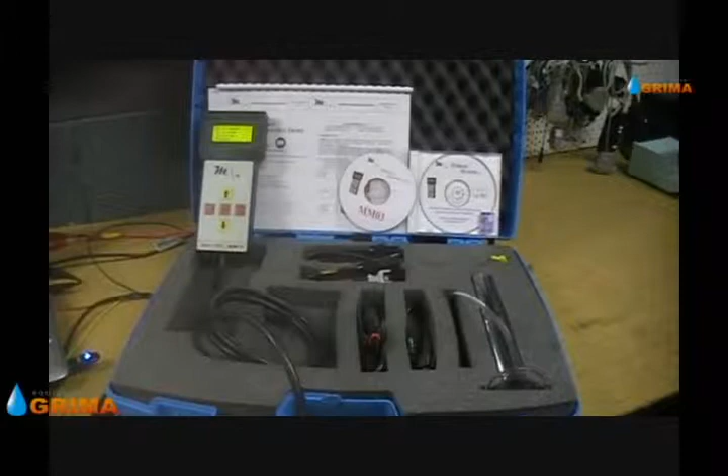Hi, today we are showing a new product to our range, the MM03 common rail tester. As it is not possible to show all its functions in one video, this will be part one of many other videos. And this first video is a general overview, and later on each function will be described in more detail.

This product allows garages to make correct diagnosis of faults in the common rail system on the vehicle, so ensuring that only the faulty component is removed for repair or replacement. The MM03 works on the following systems: Bosch, Delphi, Denso and Siemens common rail systems.

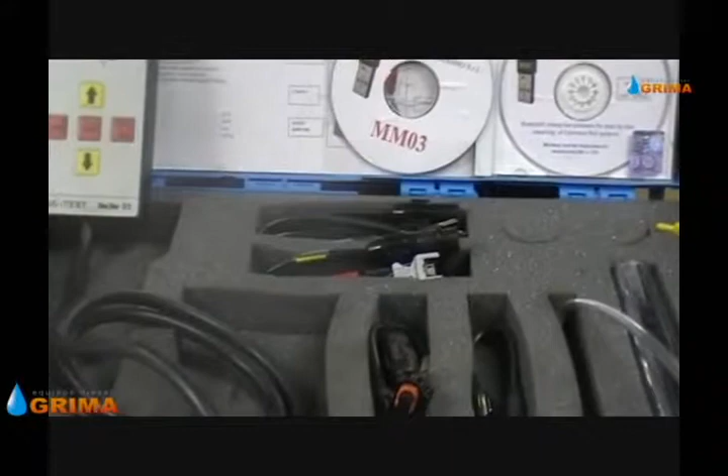On the car, the MM03, in complete independence of the ECU, can perform these functions: test common rail pressure in any working condition, also has automatic recognition of pressure sensor brand as well as testing its efficiency. Can also manage and control testing of the high pressure efficiency by allowing the operator to regulate the pressure from 0 to 1500 bar depending upon the common rail system.

Management and control testing of the pressure regulating valve or inlet metering valves efficiency by driving them with the MM03 independently of the ECU. And it also allows the operator to vary the common rail pressure when doing back leakage tests.

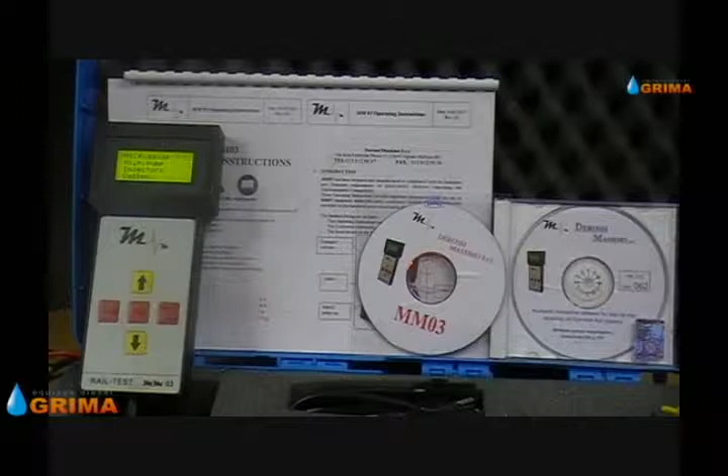Also, when used in conjunction with a hand pump on the bench, you can drive the injectors, both coil and piezo, allowing you to test the minimum injector release pressure and view the quality and uniformity of the spray pattern. Also checking the back leakage on the bench. And while driving the injector, you can vary the injector opening frequency and drive the injector in either pilot, pre or main injection.

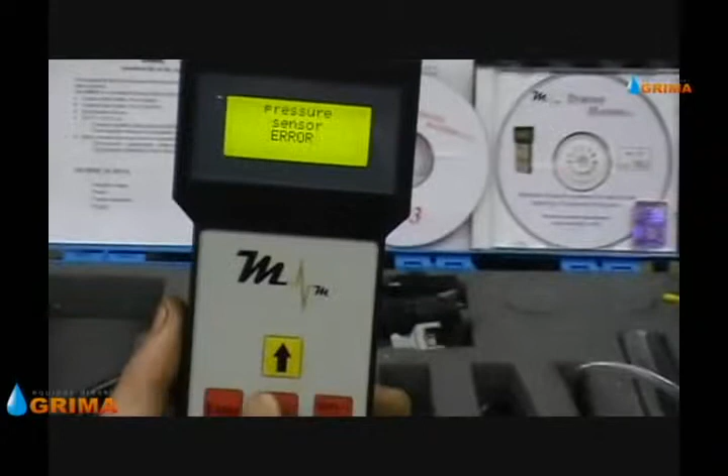Now we're just going to show the hand unit itself with the displays on the screen. First of all, when powered up, this is what comes up on the screen. So you have high pressure gauge, press enter. It's coming up pressure sensor error because we're not connected to a sensor at the minute, so it's automatically detecting we're not connected. Or if the sensor is faulty or a wiring problem, it will also come up with the pressure sensor error. If we were connected to a pressure sensor, it will display the reading in bar.

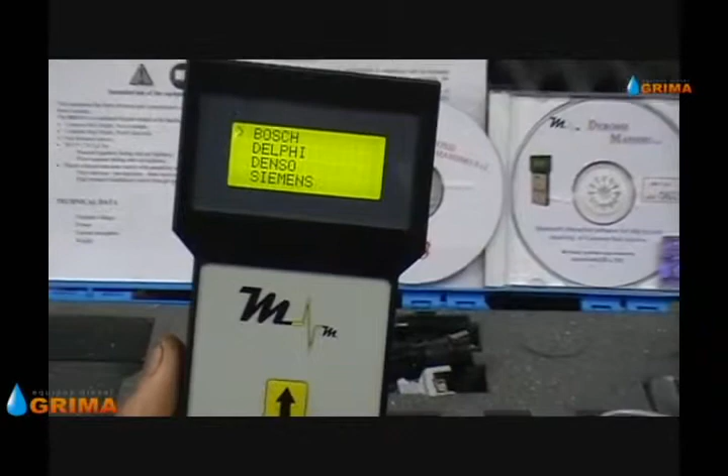Escape out of that. Then next we have high pressure pump. So you press enter. You have Bosch, Delphi, Denso and Siemens. Just went to Bosch. Then you have the different types of Bosch pump: CP1, CP3, CP1H normally open, CP1H normally closed. So we'll go CP3. Then you have different options: startup, force startup and tightness test.

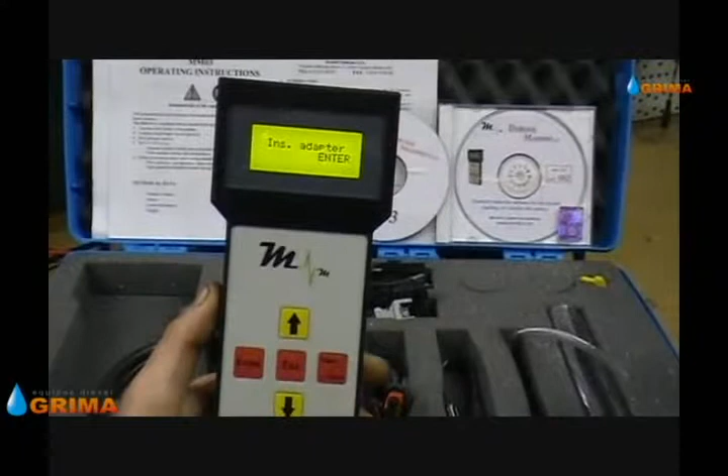Go enter startup. It's telling us here to insert a dummy adapter, because when you disconnect the connection from the pressure regulating valve and connect the MM03 to the regulating valve, now the connection from the ECU side is left open and the ECU may log a fault, so you have to insert a dummy adapter. So we'll just say that we have. So you press start and startup, enter.

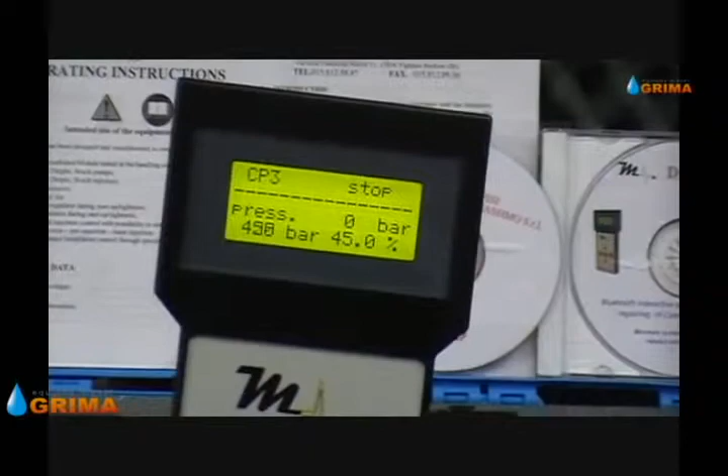Now if we were connected to the vehicle, we'd be reading the pressure off the rail sensor, and we're controlling this pressure through the regulating valve or the volume control valve. And then you can adjust the pressure here with the up and down arrows. And to start, then you just go start or stop.

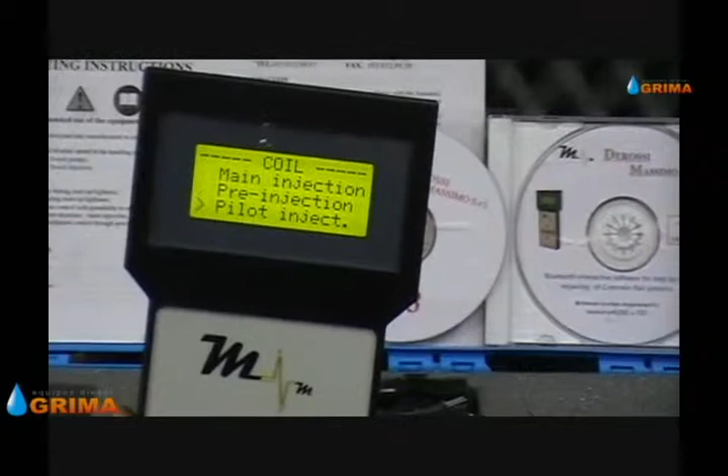The next thing you have is injectors. When you go in here, you have to choose either coil or piezo. Select coil. And the options in here, then you have to operate it in main injection, pre-injection, pilot injection. Main injection. This is telling you to use this pressure sensor part number in conjunction with the hand pump on the bench, so that you can read the pressure directly from the rail pressure sensor instead of depending upon your hand pump gauge being accurate.

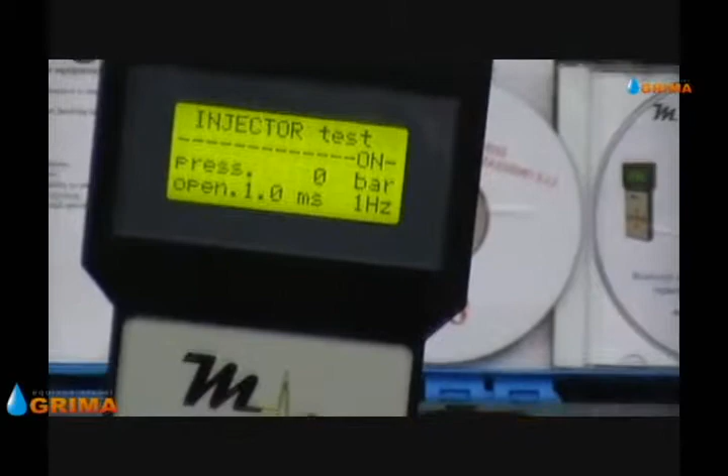Press enter, and now if you press enter again, and press start, it will now be activating the injector, and you'll also be reading the pressure from a rail sensor connected to the hand pump. And you can vary the frequency of the injector here by the up and down arrows. So again, like I said, you have main injection, pre-injection and pilot injection. And then also you have piezo.

Now in the standard kit you get the hand unit, the cable, instruction manual, the dummy simulators required for when you disconnect the pressure regulating valve and connect the MM03 to it. You need to connect this to the ECU side or the wiring loom side to prevent the ECU from going into default. And then you have a universal probe for connecting to the rail pressure sensor signal wire, so you can read the fuel pressure.

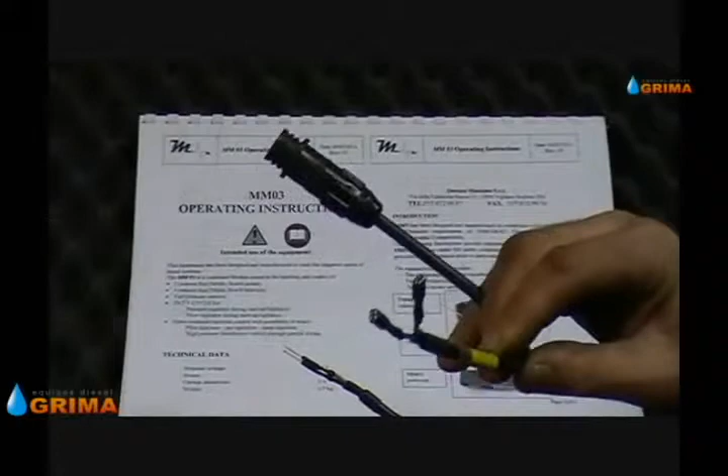You have a universal connection for connecting to various injectors and volume control valves and pressure regulating valves. Then you have the Bosch injector connection, Delphi injector connection, and then you have various pressure regulating valve or volume control valve connections. Also you have a graduated burette and injector leak back connection.

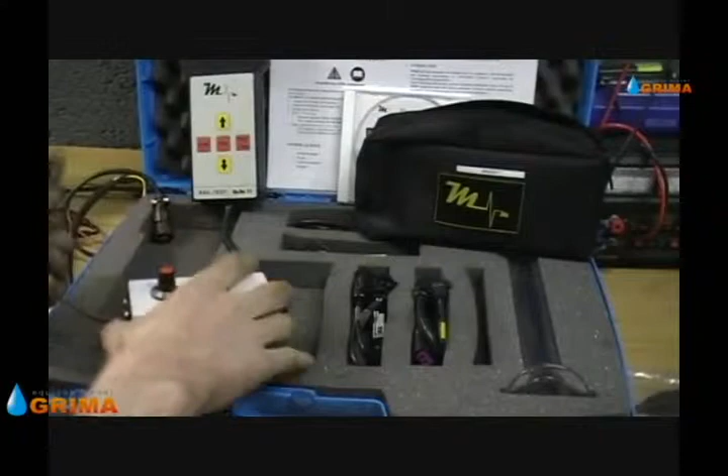Now we're going to show you some of the most important optional extras for this kit. Firstly, you have a connection cable for Siemens common rail system for connecting to the volume control valve and the pressure regulating valve. Then we have the optional piezo injector driver kit, used in conjunction with the MM03, which will allow you to drive both Bosch and Siemens piezo injectors on the bench.

The next optional extra then is the software Bluetooth. This software allows the user to graphically display the tests on the PC and to save and to print the results. So in other words, anything you're doing on the hand unit will be displayed on the PC via Bluetooth and is updated in real time. So anything you're reading here instantly will read the same on the PC. So you can see pressures, actual pressures, target pressures, minimum max pressure, all this on the PC.

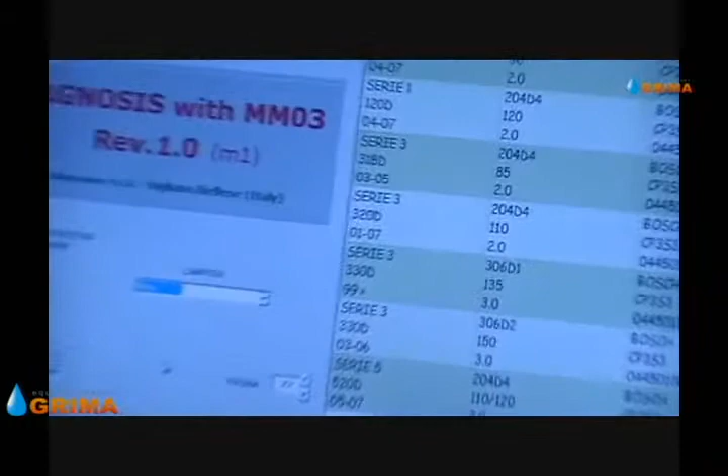And then you have some information also in a database, a branded database. For example, you'll have the type of system, part number, etc. And also you have kind of a guided tutorial then on the tests. So say for example we go into high pressure gauge, press enter. Now you can view on the PC, it shows you the various locations of the pressure sensor, and then it will show us in a graph form the pressure when we are reading it. This can be printed and saved.

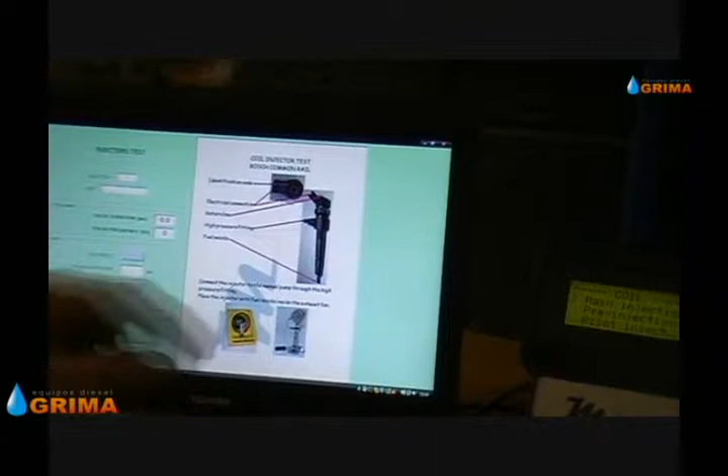Also then we go to injectors, coil, piezo. It gives you instructions then on how to perform this. You can put in the injector number, the code, then you can view the pulse duration in milliseconds, the frequency, the pressure you're reading, and it gives you a brief description then on the common rail injector and how to connect it.

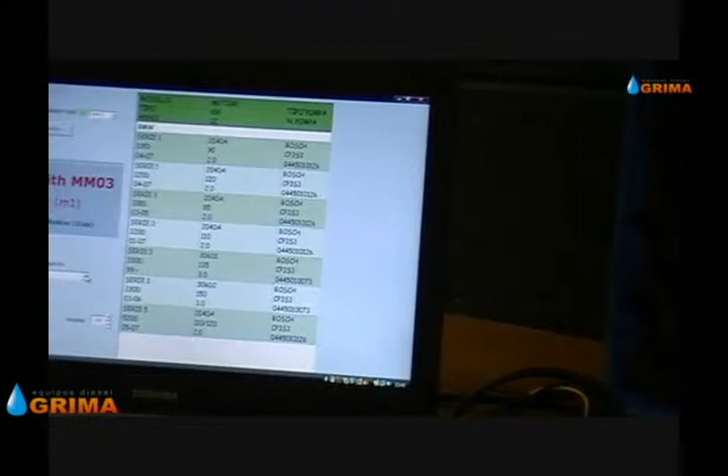So it's a useful software and kind of guides you through all the various tests you can perform with this. And as we said, it's displayed in real time, so you can save, view later, print to show to the customer, various other things.

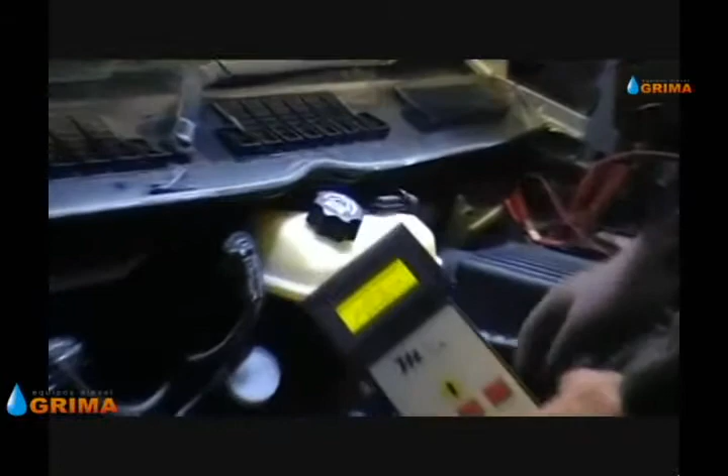Hi, today we are showing part 2 of the MM03 and we'll be using it on this 2005 Fiat Scudo 2 litre JTD with Bosch common rail fuel system. So you just connect up the tool onto the battery, positive and negative. Tee in on the rail pressure signal wire; we already have this connected.

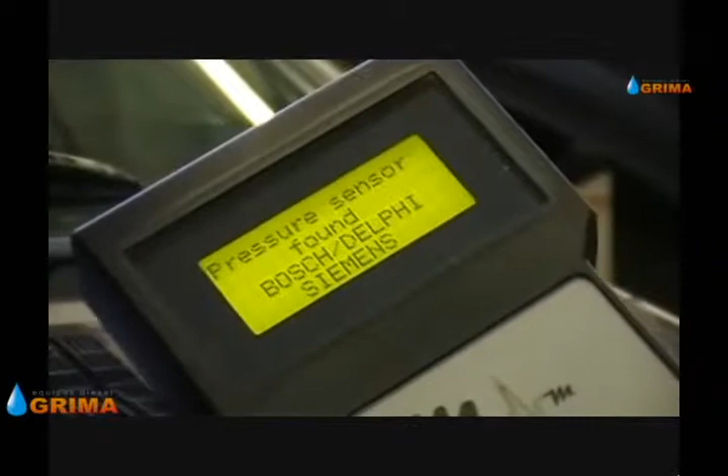Then you just go into high pressure gauge, enter, and the tool then will automatically recognise the sensor. So it's found Bosch, Delphi, Siemens sensor, which are similar in the way they operate. For example, if we were working on a Denso system, it'll pick up it's a Denso. If there was an error with the sensor or a problem with wiring on the vehicle, when we go to this stage, it will come up no sensor found. So you'll know straight away if there's a fault with the sensor or the wiring.

So it's found the sensor. Press enter, and it's doing the 0 calibration. Now already it's reading close enough to 0, so we know straight away our 0 point for the sensor is good. So press enter. Now we can start the vehicle and monitor the pressure.

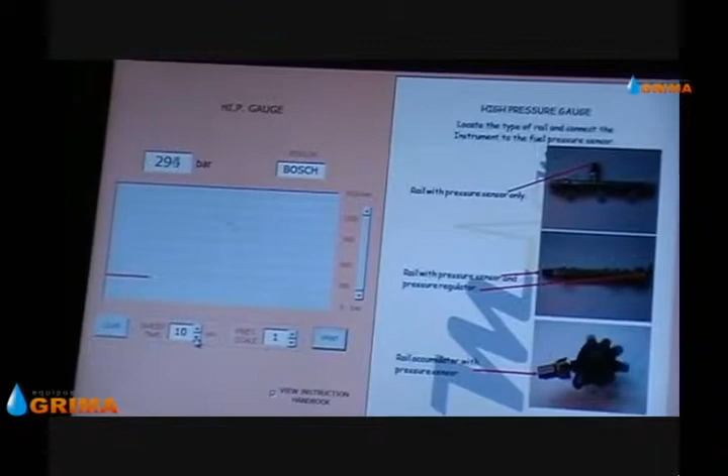Also, if you're using the Bluetooth function, you can view it on your PC in a graph format. You can adjust the pressure scale, lower or higher, the sweep time on the screen. Watch me accelerate.

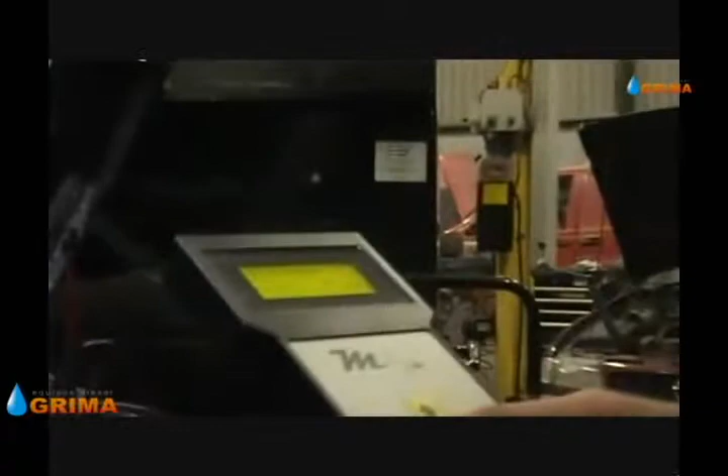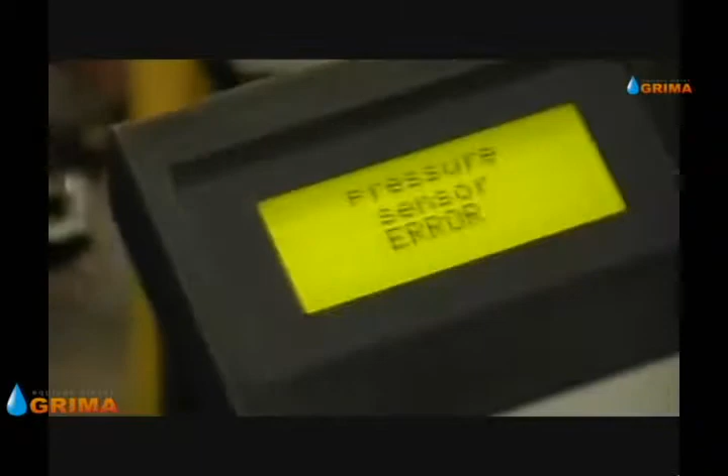So that's it. So it's one of the first things where you can read the pressure directly off the rail pressure sensor. And as we said, it auto detects the type of sensor and does a test on the sensor when you go in first. For example, if we try to connect now with the ignition switched off, it comes up pressure sensor error because the ignition is turned off in the van and it's not registering it.

This part of the tool is very useful, for example, if you have a non-runner and you want to check the common rail pressure. For example, if your diagnostic tool doesn't have this function for reading the common rail pressure, or a lot of diagnostic tools tend to lose communication when you're cranking, so that you cannot view the pressure live, so you can view it with this.

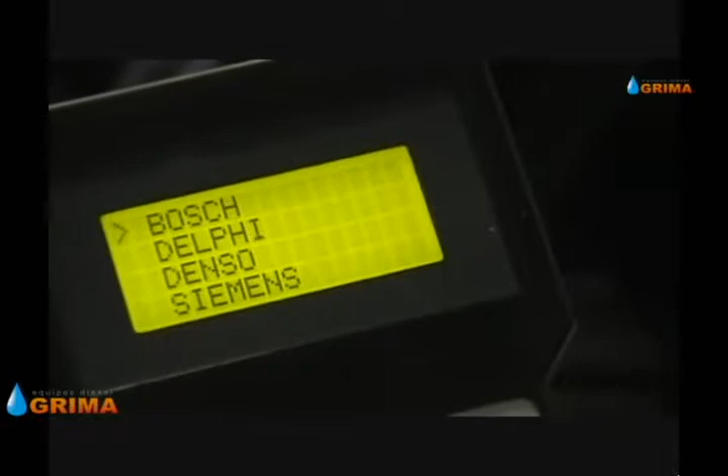Now the next part where we can go into a high pressure pump. Go here, and then you have Bosch, Delphi, Denso, Siemens. And just remember, everything we're doing here is displayed on the PC as well, via the Bluetooth, which is kind of a tutorial about how to connect to the common rail system. So we're going to Bosch, and CP1 is the type of system.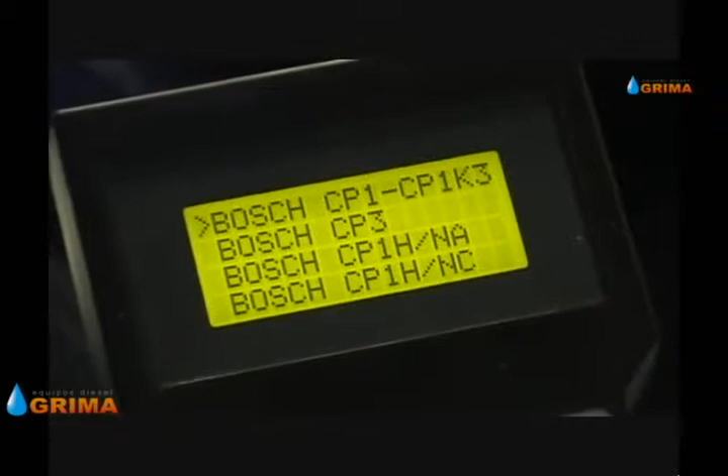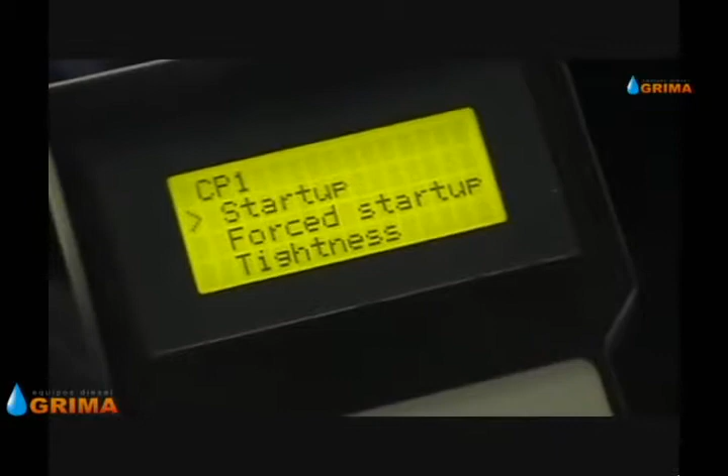And sorry, I forgot to mention, we're now connected to the rail pressure sensor signal wire, and we're connected to the pressure regulating valve with the MM03, and we have the dummy blank in the ECU side to stop the ECU from going into default. So I press enter, and so now we have startup, forced startup and tightness. So we're going to start up, enter.

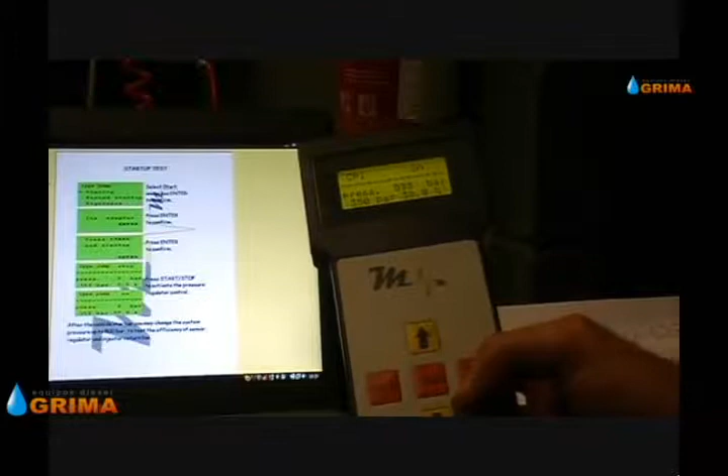Now it's telling us to insert the adapter. This is the dummy adapter into the wiring loom or the ECU side. Insert adapter, press enter, enter. So now when we switch this on, the MM03 is going to be driving the regulator to give us 350 bar of pressure. So if I press start, start up the engine, it will take a few seconds to stabilise.

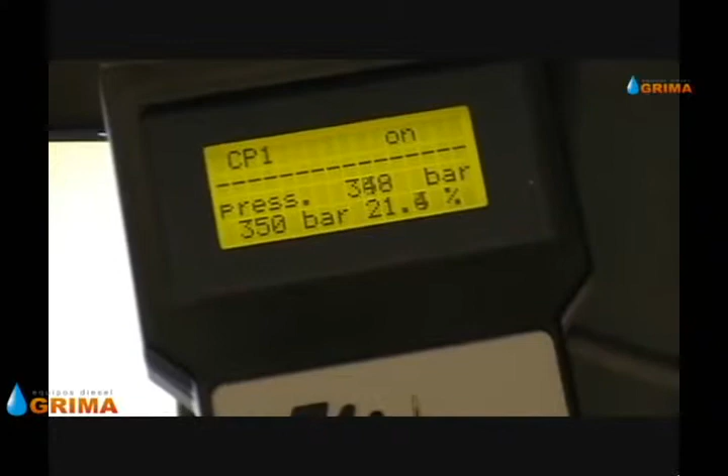You can see that the actual pressure, 350 bar, is matching the set pressure that we're driving the regulator to. So this is a good indication that the system is operating correctly, because the target pressure is matching the actual pressure.

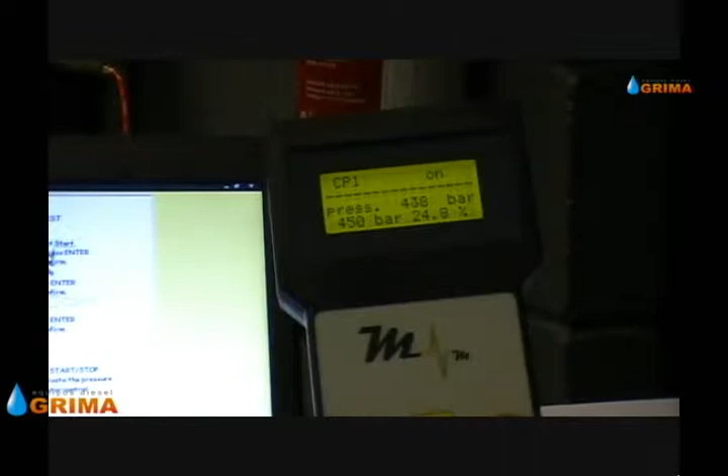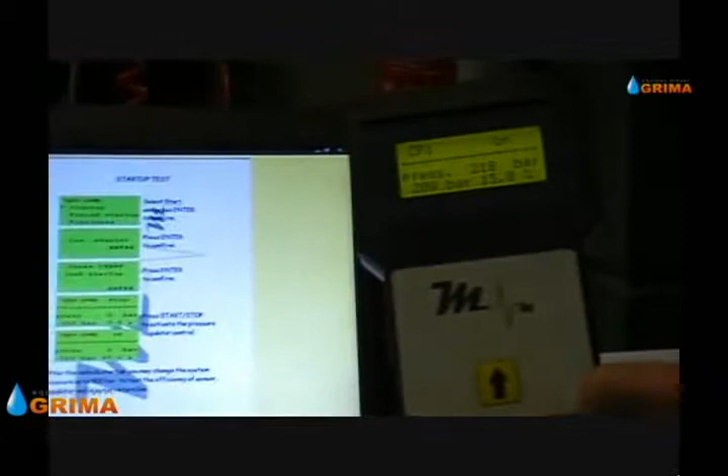Now we can also adjust the pressure here and see does it respond to the actual pressure. For example, if we go up 400 bar, it's coming up to 400 bar. So we go 450, very close to 450, so the system is fine. We can adjust it the whole way up to 500 bar, and then back down to 200. Now we can press stop and it will switch off the regulator completely.

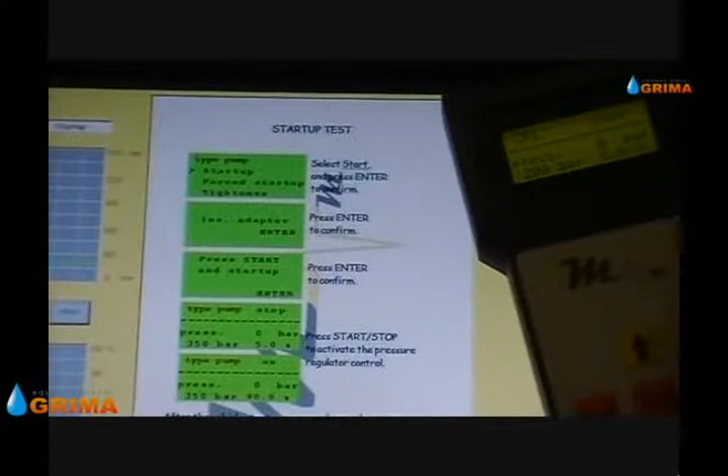In that test we were driving the pressure regulating valve independently of the ECU. This is a very useful test to check the efficiency of the system by comparing the target pressure with the actual pressure, and it proves that the regulating valve is working okay as it responded to our adjustments.

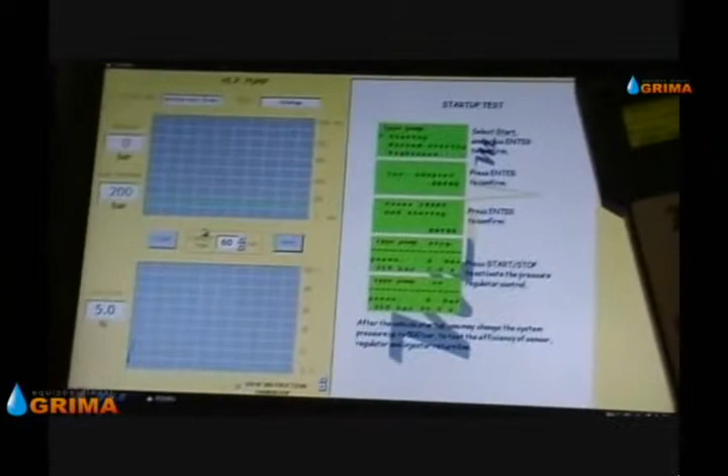And also, if you had a non-start case where the pressure was not building up, and if you drive the regulator with the MM03 and the pressure then builds up, it proves that you have a fault with the wiring to the pressure regulating valve, or a fault with the ECU where it is not signalling the pressure regulating valve.

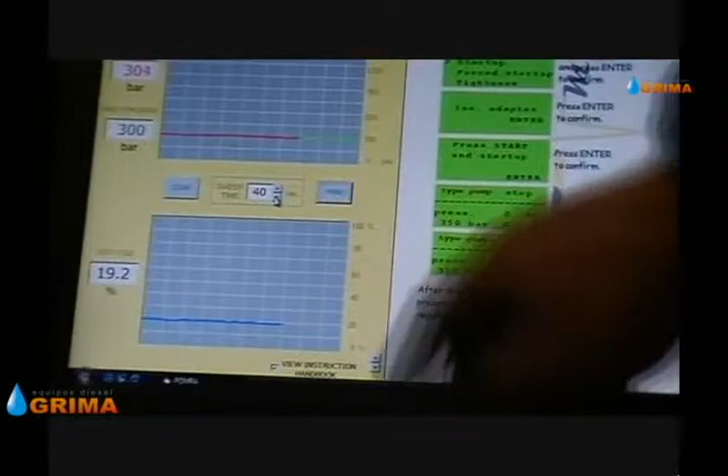When using it in conjunction with the software via Bluetooth, you can view the pressure, the actual pressure in red and the target pressure in green. So as you can see, the red line is right on the green one, so this is a good system as the target pressure is matching the actual pressure.

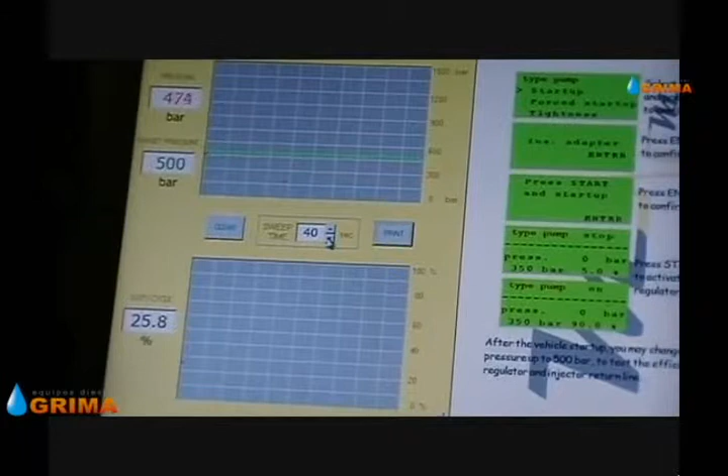You can also see the duty cycle; this is the percentage that we are driving the valve on. If we adjust the pressure, you watch the duty cycle increasing, the pressure here increasing. As we said earlier, you can adjust this up to 500 bar.

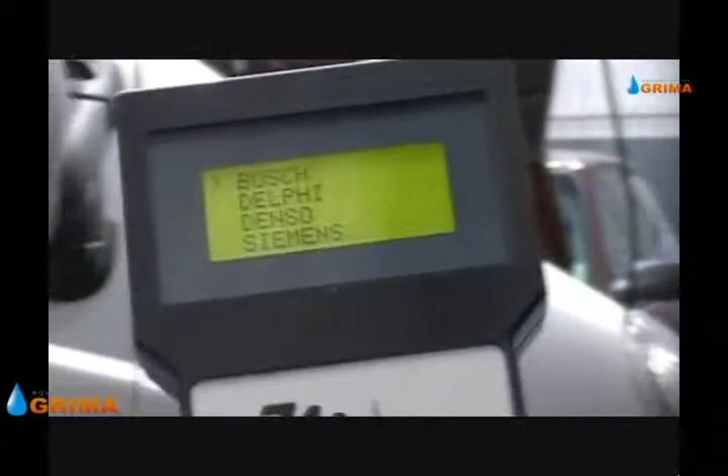Now the next test we're going to do is a tightness test. This checks for tightness or efficiency when cranking. It's an ideal test for a non-runner. When we're doing this test we don't want the engine to start, so we disconnected the cam sensor, or alternatively you can disconnect the injectors.

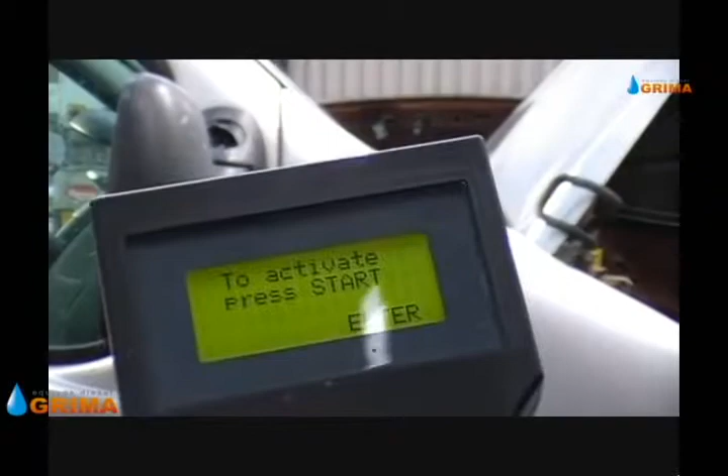So next then we go into Bosch, CP1, tightness. So it says do not start motor, so we have the cam sensor disconnected. And now we'll just get ready to crank this while we're doing it. When I tell you there. Okay, crank.

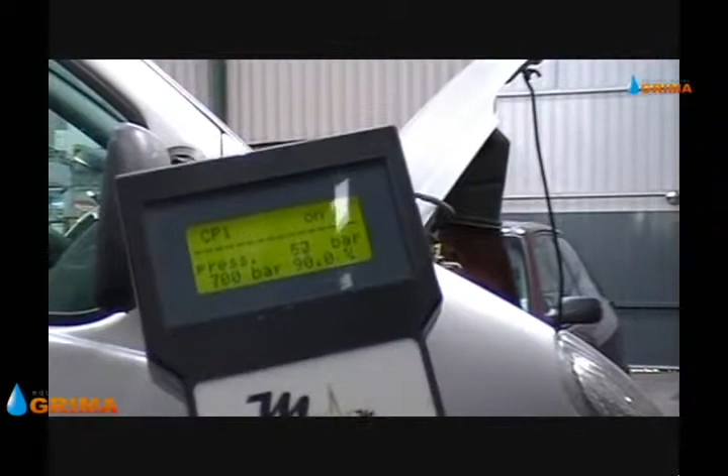Okay. So when we're doing this test, as you heard, the battery started to go down, but the pressure still rose to just under 700 bar. So this is a good indication of the efficiency of the system, proving that we haven't got too much leak back from injectors, proving the efficiency of the pump, proving that the regulating valve is working, and various other things.

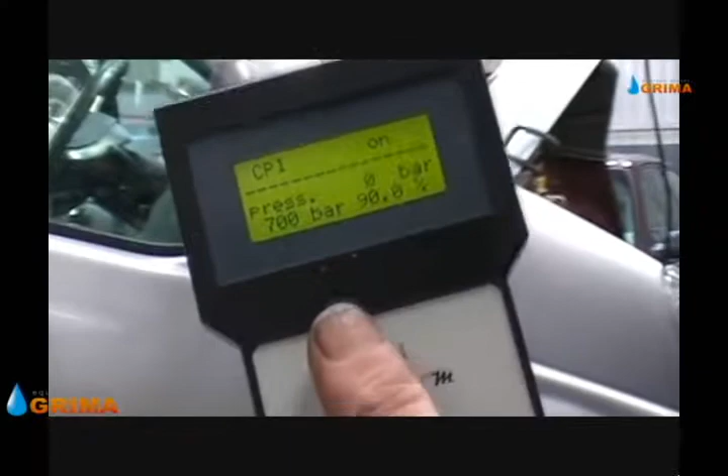The next thing we could do then, if this pressure didn't rise when we were cranking, say for example only went to 300 bar, is maybe check the injector leak back when cranking. If you had too much leak back from an injector, you could remove the pipes and fit blanks to the fuel rail, so you're taking injectors out of the equation, and then do the test again. Now if the pressure did increase to 600-700 bar, we know the injectors are the problem.

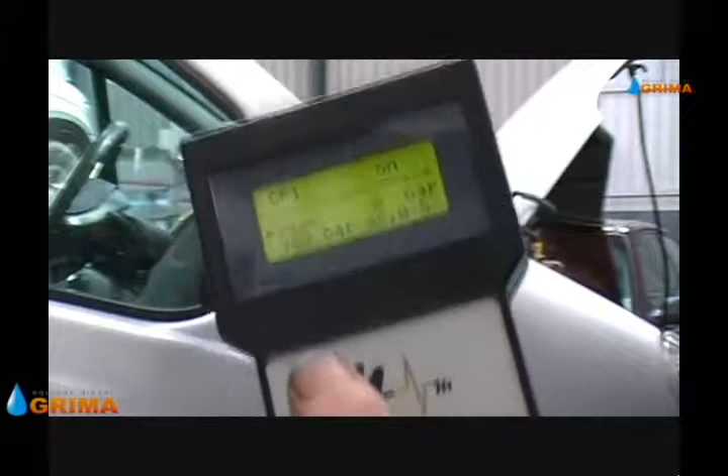If the pressure still didn't increase, the next thing we could do then is remove the pressure regulating valve and fit a dummy regulator into the back of the pump. So then if the pressure did increase, we know it's a regulating valve fault, or if it didn't increase, then we know it has to be the pump.

And in that last test, sorry, I forgot to mention, the tightness test, the MM03 was driving the pressure regulating valve to give us a commanded pressure of 700 bar, and we achieved just under 700, so this is okay.

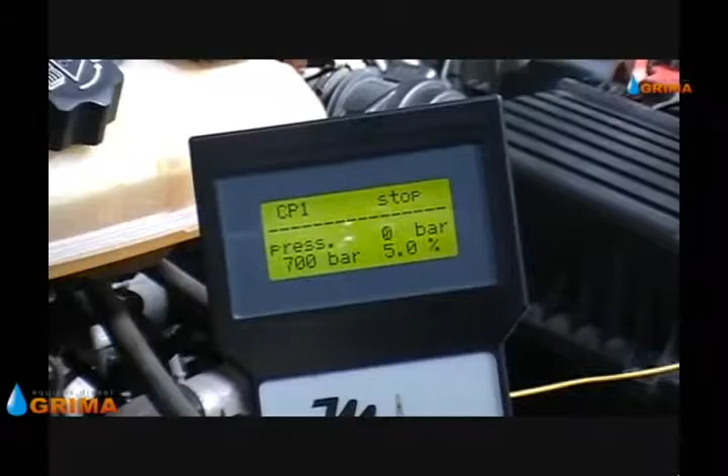Another test we can do then on the pressure regulating valve is to check its mechanical efficiency. We'll disconnect the MM03 from the regulator and also leave it disconnected from the vehicle's ECU. So when there is no supply to the regulator, with the predetermined spring pressure, we should have a cranking pressure of 60 to 70 bar, and if we have this, we know that the mechanical integrity of the valve is okay.

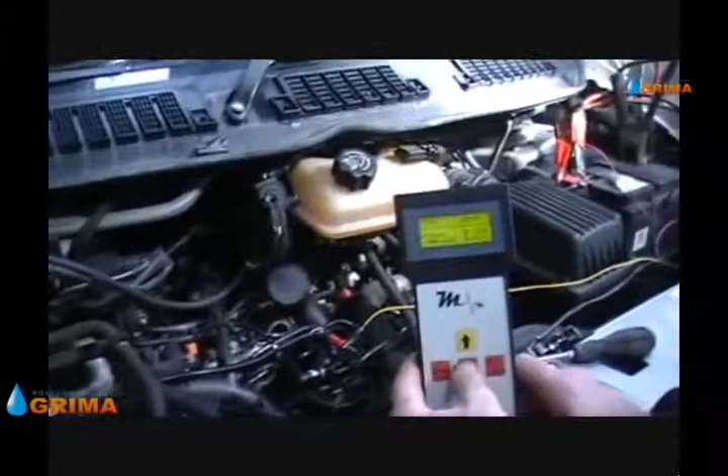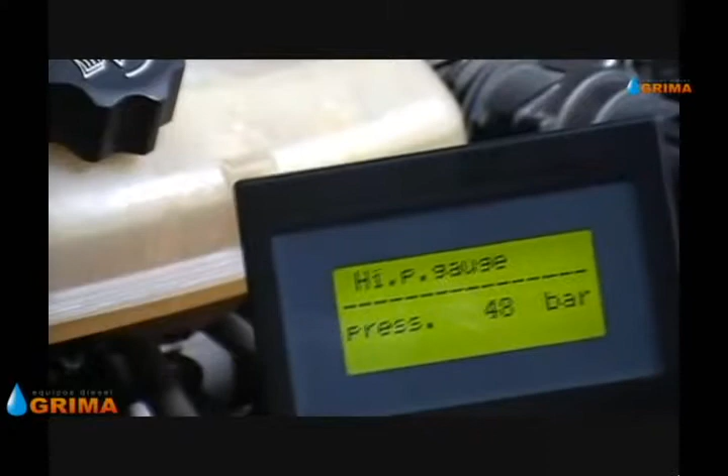So to do this, we'll just escape back to the high pressure gauge. Can you crank? Okay. So as you can see, it went up to about 65 to 70 bar. So that test proves that the pressure regulating valve is working okay mechanically, and we've already proved it's working okay electrically because we were able to drive it with the MM03.

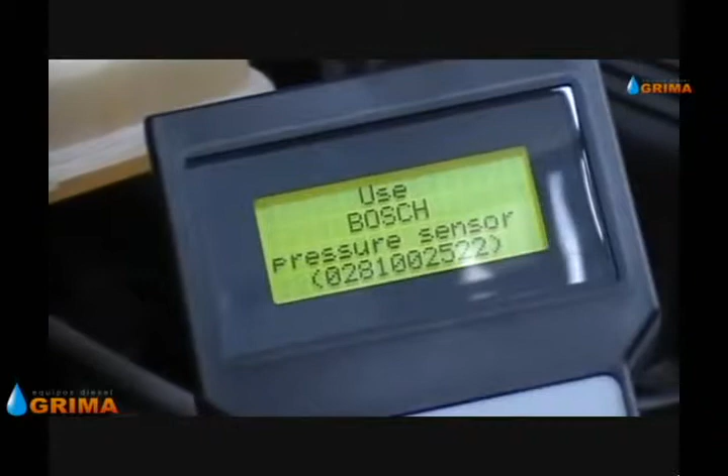That's it. So another test we can do with this is if we go into injectors, and now we are connected onto number 1 injector. Select the type, coil or piezo, so it's coil. Main injection, so you can go under main. It's saying to use a Bosch pressure sensor part number here, but this is for when you're using it on the bench in conjunction with a hand pump. We're just wanting to do a solenoid test now, so it doesn't matter about this. So enter.

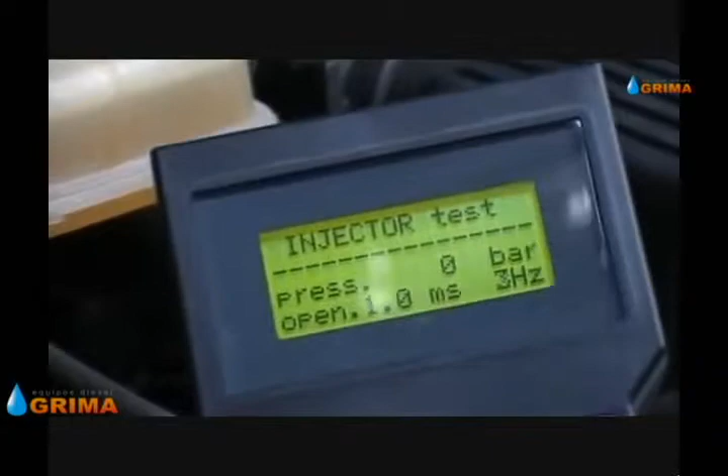So now, if you listen carefully, you will hear the injector activating, the solenoid clicking. So press start. We can adjust the frequency. It's at 3 Hertz. So you can hear the injector solenoid operating. So again, this is another good test to prove the electrical part of the injector is working okay. It does not prove the mechanical side of it or leak back, but proves it's working okay electrically.

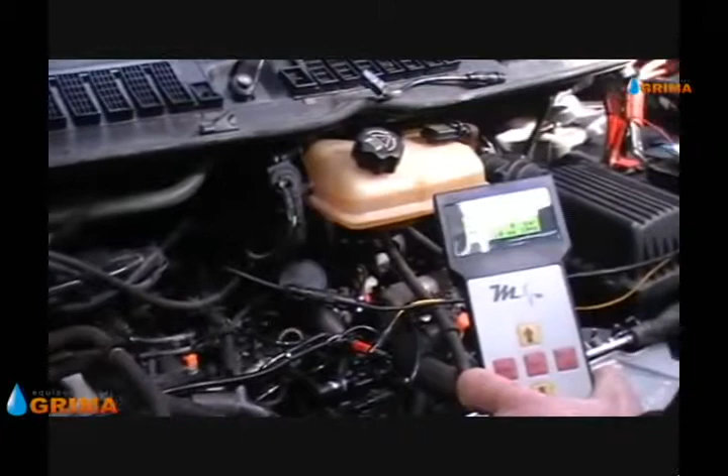We will be doing more on testing the injector in a later video, where we'll be testing the injector on a bench with a hand pump. So keep an eye on that. We'll be doing something on that later on.

And so that's pretty much it. As you can see, there's a lot of different tests you can do with this tool, and there are many others, but due to time constraints with the video, we can't show them all.

Thank you. MM03 common rail tester, and we'll be showing how to test injectors on the bench in conjunction with a hand pump. On the hand pump, you can also connect a rail pressure sensor on the line, and if you're using a rail pressure sensor, you'll have to use a power supply unit set to 5 volts supplied to the rail pressure sensor, and just a 12 volt battery to power up the MM03.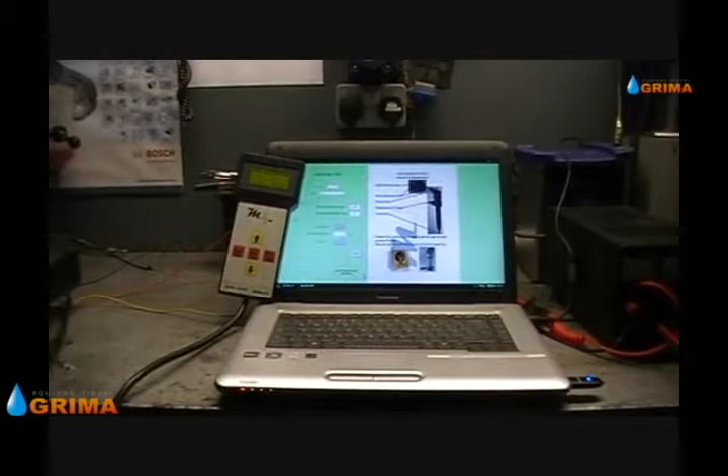On the bench then we can drive the injector with MM03, both coil and piezo. And this will allow us to test the spray pattern, the injector opening pressure, and also we can check the leak back rate. So we select injectors, coil or piezo. So the one we're testing is a coil Bosch injector. Enter. So as you can see, you can view all this via the PC if you're using the Bluetooth software.

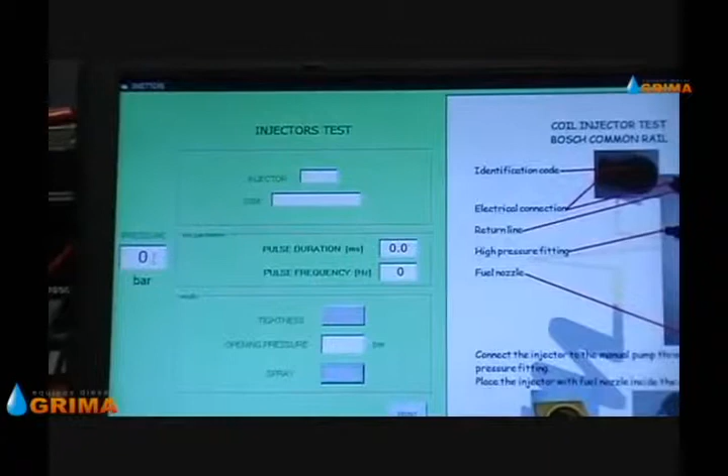So with the Bluetooth software, then you can view the pressure here, the pressure that we're reading from a rail sensor on the hand pump. You can insert the injector part number. You can view the pulse duration here, the frequency here. Then you can go to here. You can say OK or not OK for the test, for the tightness test.

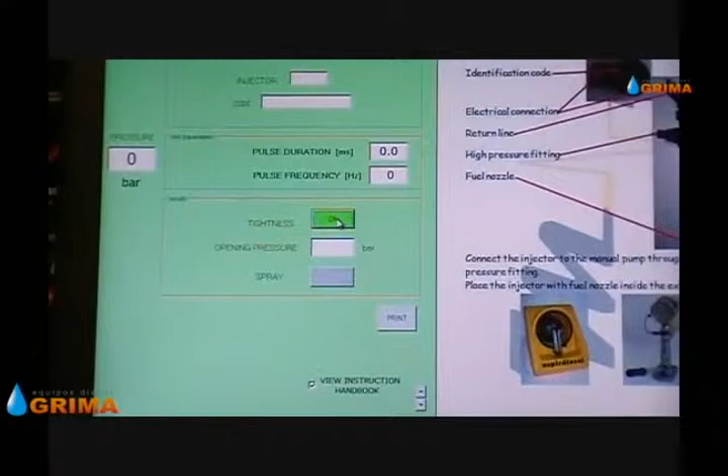You can insert the opening pressure when you test the injector and see what pressure it's opening at. You key it in here and say OK or not OK for the spray pattern. And so then you can print this, or save this to show to the customer. Also then here you have information about how to test the injector. So we selected coil injector test Bosch common rail.

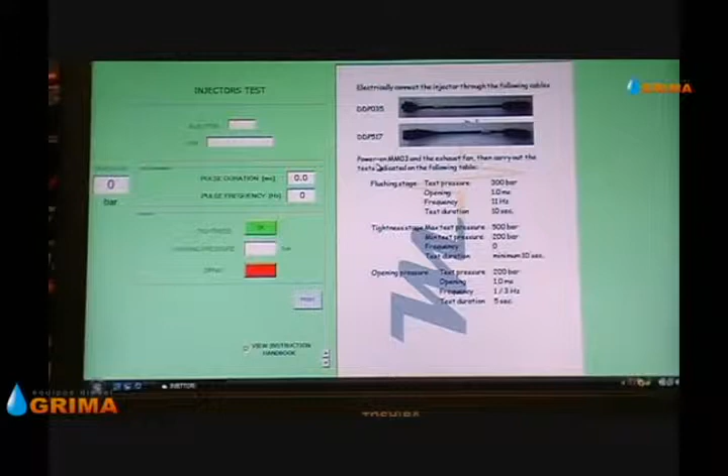So if I scroll down through the manual here, it gives us information then about which cable to use, and then it gives you test data for testing the injector. So as you can see, it tells you here about how to do the flushing stage, tightness test, and the opening pressure test. Like for example, in the opening pressure it tells you bring it up to 200 bar, 1 millisecond, and set it to a frequency of 1 to 3 hertz and test it for 5 seconds.

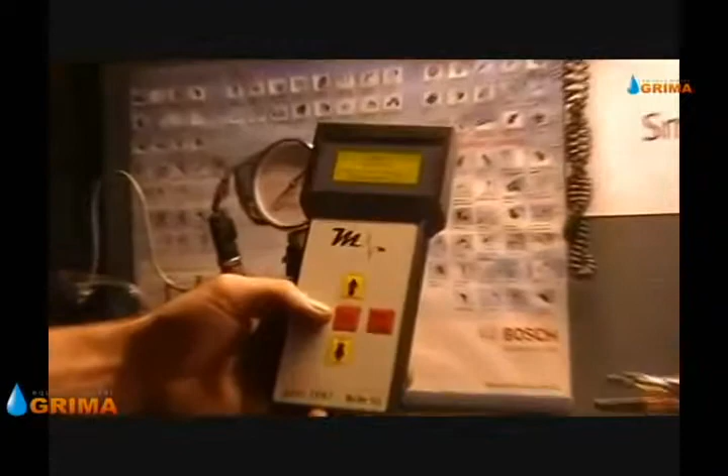Okay, so first we'll do the flushing stage. So we're going to main injection. It was telling us the part number of the rail pressure sensor to use on the hand pump, so that is the one we're using. Press enter. Now, on the flushing stage they're saying bring it to 300 bar, opening of 1 millisecond, which is okay, and we bring it up to about 10 hertz. Okay, to start then you just press here.

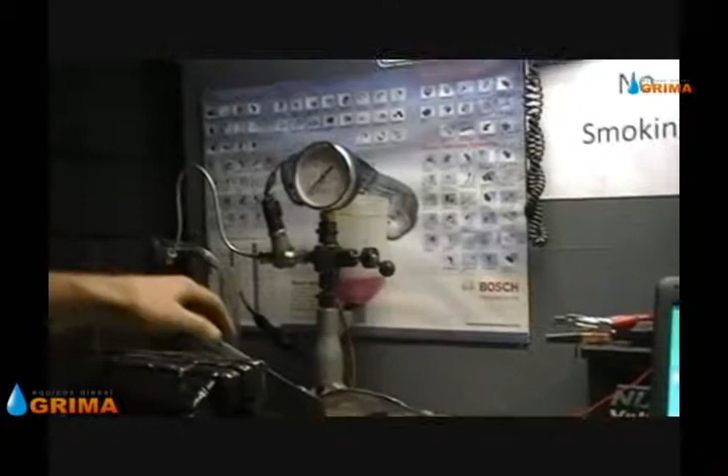Bring up the pressure. So that's just the flushing stage, and it's just priming out the injector. Then you can also do a tightness test. So like we said, you bring the pressure up to about 500 bar, the minimum pressure of 200 bar. So you time how long it takes the pressure to drop from 500 to 200 bar, and it should be a minimum of 10 seconds.

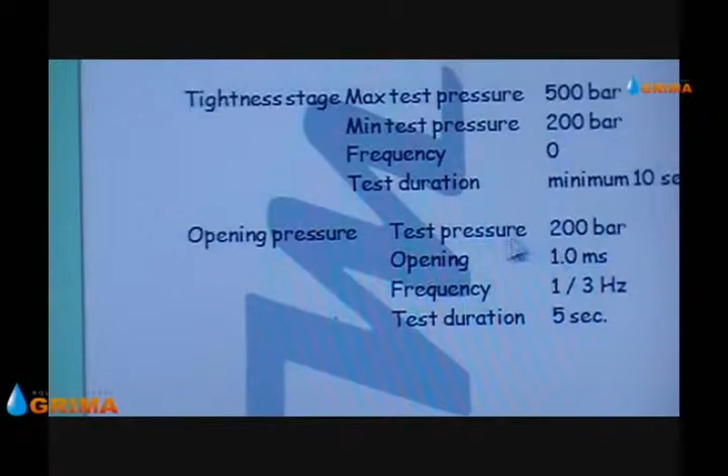Then another test we can do is the opening pressure, and we'll do this now. So we bring the pressure up to 200 bar, the opening 1 millisecond, so we're set to that, and the frequency of 1 to 3 hertz. So we'll adjust down the hertz, 3 hertz, and do this for 5 seconds. So we'll press start.

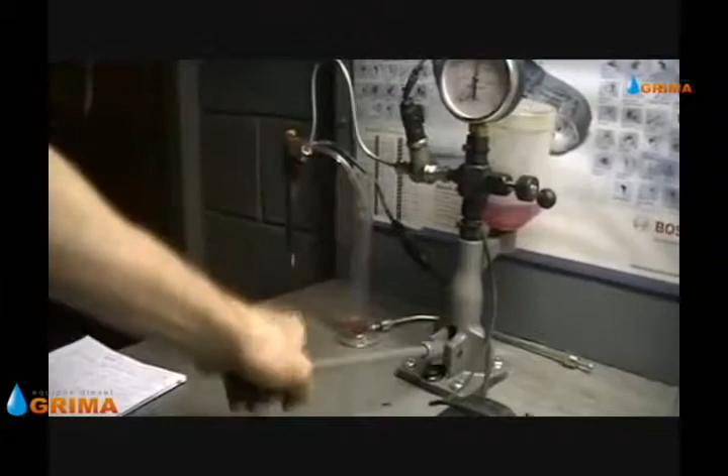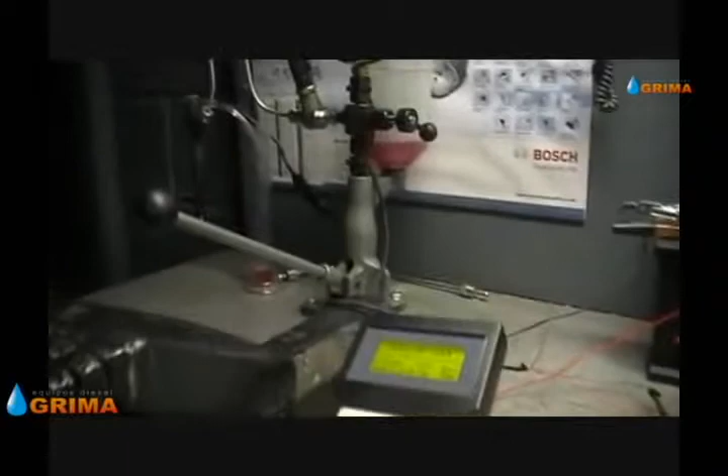So now we'll bring up the pressure slowly to see when the injector opens. And as you can see, it's starting to open just at somewhere between 180 to 200 bar. Then another test, we can just check the spray pattern. So if you can zoom in on this.

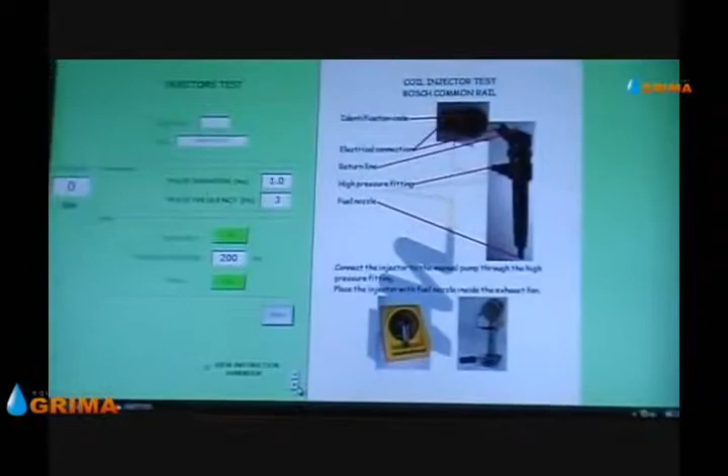That's it then, so we can fill in all the details of the injector here, part number, and print it off. Like we said, then you have instructions for each type of injector. So this is the Bosch coil injector. If we keep scrolling down, you have the Delphi injector, test procedure for this, Denso, test procedure for that. If we escape back and go to piezo,

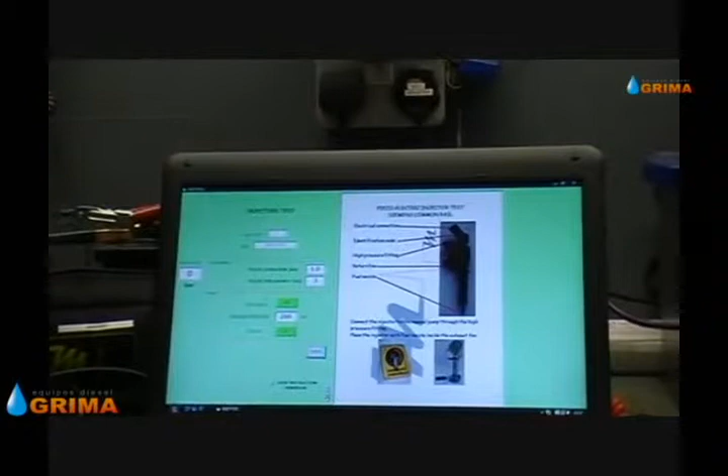then it's showing a Bosch piezo injector, test procedure, and it's showing you to use the trigger box when testing the piezo injectors. Then you have the Siemens piezo injector, and a test procedure for this also.